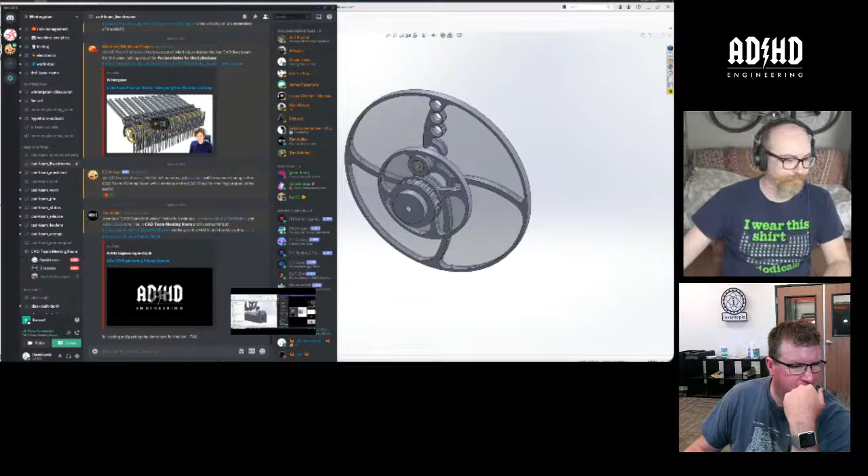It should be streaming now. Okay. There's no audio coming through on my end, so if you still hear the echo, it's not me. How about now? How about now? What? I don't know. Okay. I don't know why. Oh, it's because I don't have you. I had unmuted you on OBS. Say something again. There we go. This is David. There we go. We're all good. We are all good. So let's see. Am I connected to the stream? It says no. OBS is being weird for me today. I don't know why.

I'm going to streaming. I don't know why I did that. Streaming now, or at least I think. Yeah, it is. I can see myself. I just moved. Okay. Whoops. I don't know what I hit. Is the stream still going? Yeah. All right. Well, there we go then. Yeah, I don't know why. Crazy delay, but it's always been like that. Yeah. Well, no.

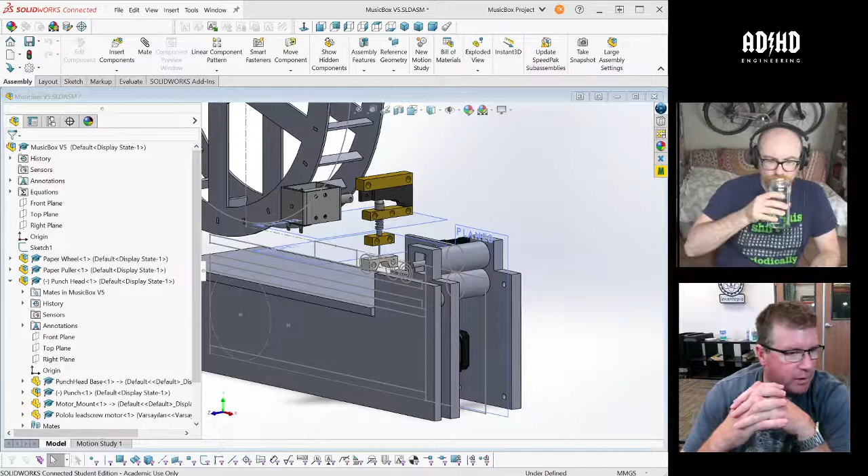So that is that. There's been a lot of work that I've done on the music box, kind of as a trial project, and David has been working on the MMX studio version. We both have stuff to share. We have opinions to bounce off each other about how we're going to do stuff, and David has some specific things to chat about in terms of how we're going to use SolidWorks for this project as well. So let's dive in.

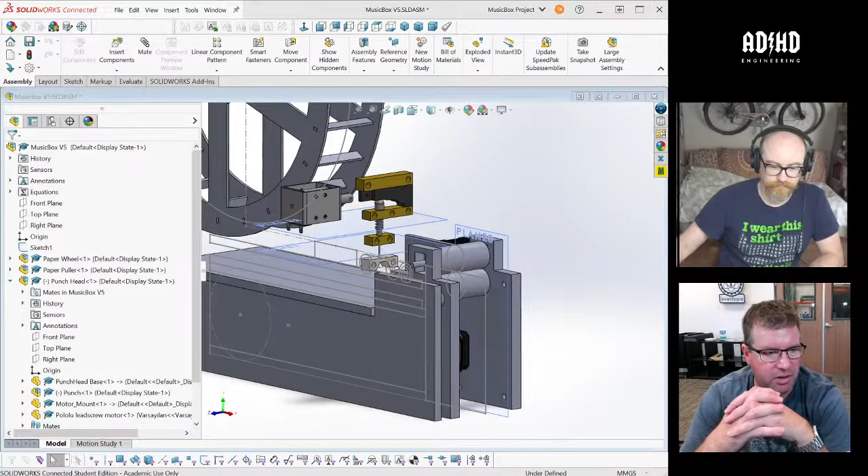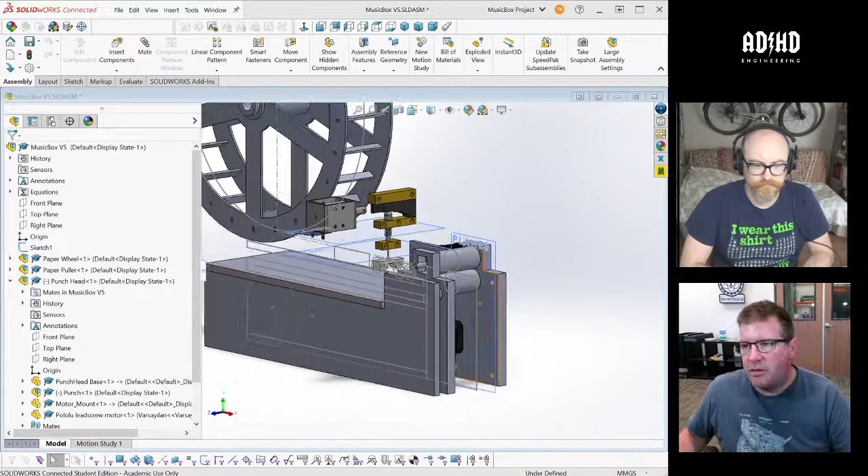What do you want to do first, David? We can go over the music box if you want. It's up to you. Okay. I don't have any preferences. All right. Yeah. Let's do that because I think normally that's kind of our flow, right? So just in terms of figuring out how we model things and what our process is going to be like, I started over the music box. You can see this is music box version 5. And it's because we're experimenting with the process, right? But I am now starting to treat this like we would want to do it.

So in SolidWorks, we have an assembly. There are no parts directly in the assembly. We only have sub-assemblies. We were talking about how we're going to do this with the marble machine. And the marble machine, we're probably going to have assemblies and sub-assemblies, so there'll be no parts in the top 2 levels. You'll see I here have... Yeah, I'd say that's pretty accurate. Sorry, I didn't mean to interrupt. Yeah, okay, that's fine. And so here I have the paper wheel, and it's got the parts in it.

Only the punch head has a sub-assembly, and that's because the part that goes across will move with respect to the larger module. So this one's a little simpler, but what I want to point out, and this is kind of how I was playing with working this way, is that if I turn all these guys off, I have some basic assembly reference material here. This is just the bare bones of the shape of the thing.

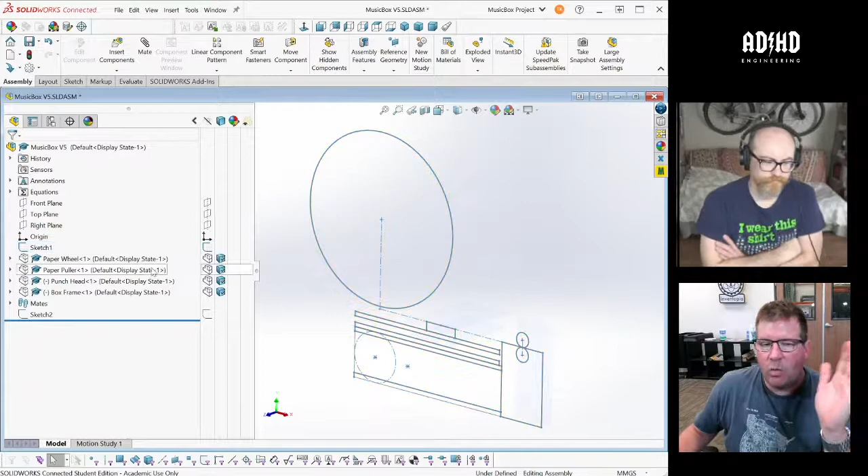And I don't know why it happened, but when I added another sketch to the top level assembly for reference geometry of how things are going to line up the other way, it put this down here. It didn't put it up here, I don't know why. It doesn't really matter, I guess.

Have you tried dragging it back up? I have now. Oh, it worked. Why did that work? Okay. That's kind of a derp. Like, have you tried moving it? All right, yeah, good for SolidWorks.

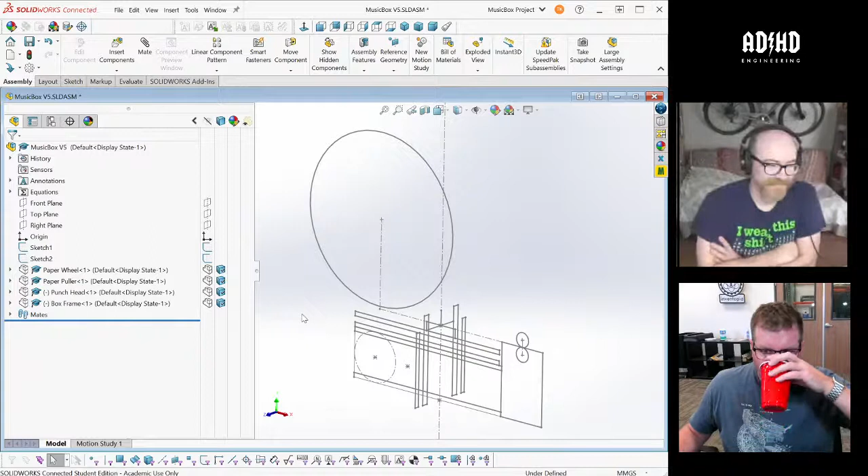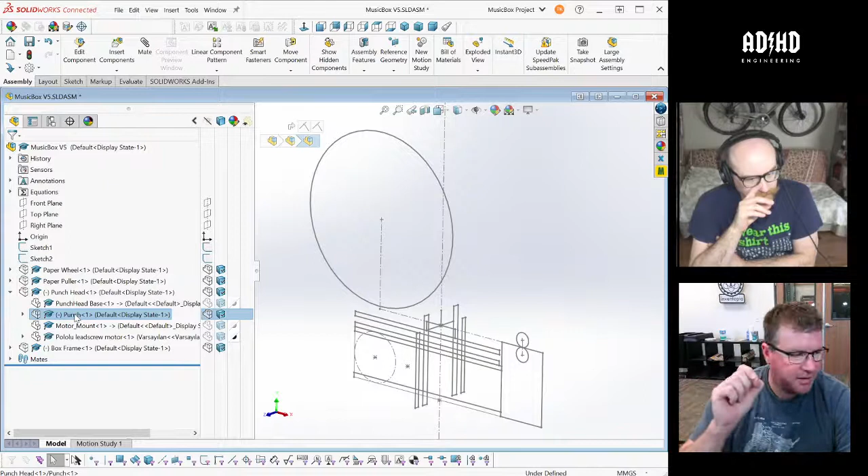Parenthetically, I also did a thing where, when I had this punch head thing, I realized I had an assembly, and then I also had this punch sub-assembly for the carriage, and I brought it into the master assembly. I was like, no, that's a sub-assembly of the thing, so I just dragged it into the other assembly, and hey, that works in SolidWorks. That's so nice.

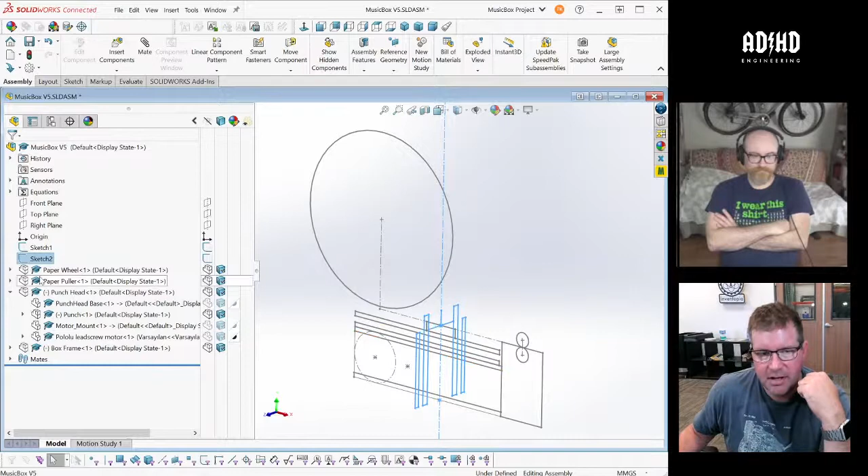In any case, we have this master reference assembly. You can see, since we have the relations, these guys only relate to each other, right? And there's not a whole lot of detail in this skeleton. If I turn on this guy, this paper wheel, it has its own. I'm going to drag this one up too. Can I get away with it? It worked with the other one. You should be able to.

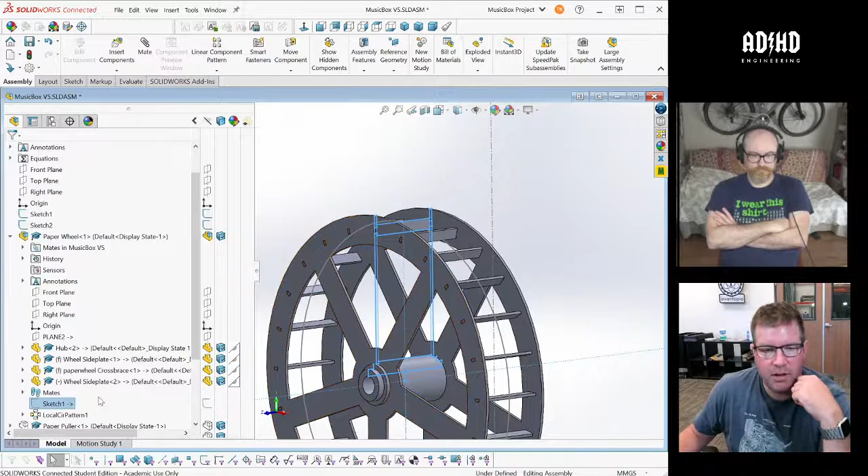Either way, you can see this one has its own sketch geometry, which defines the size and the shape of this hub and a bunch of other things. And if you look at the references, it is only related to this first sketch. When I made these wheel side plates, first I made the hub, and it would be really easy to draw this side plate starting with a sketch that's on the side of the hub, right?

And David, you can tell me if this is the wrong thing to care about. But my feeling was, if I deleted the hub, I didn't want to break it. So when I did this side plate, I made inside it its own reference geometry for where it's going to start, based not on the side of the hub, but on the reference geometry that was in here. Does that make sense? So I don't have any dependencies. The dependencies here are on this sketch, not on the hub. So you shouldn't have parts within that subassembly that are referring to each other.

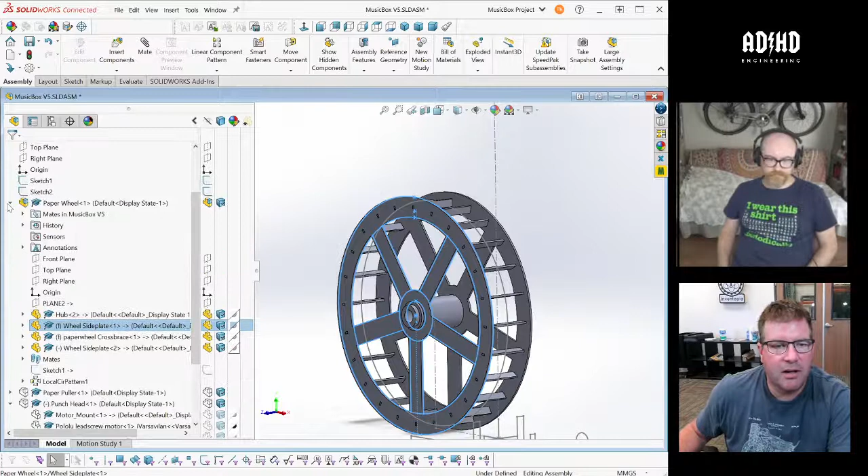Let me show you the counterpoint to that, because I did this incorrectly in another part I was working on today. Let me turn off this guy. So here's the paper puller. And I love, by the way, the show relations arrows. It's amazing. Actually, I don't want the paper puller, sorry. That's the wrong one. Punch head. And turn this guy on.

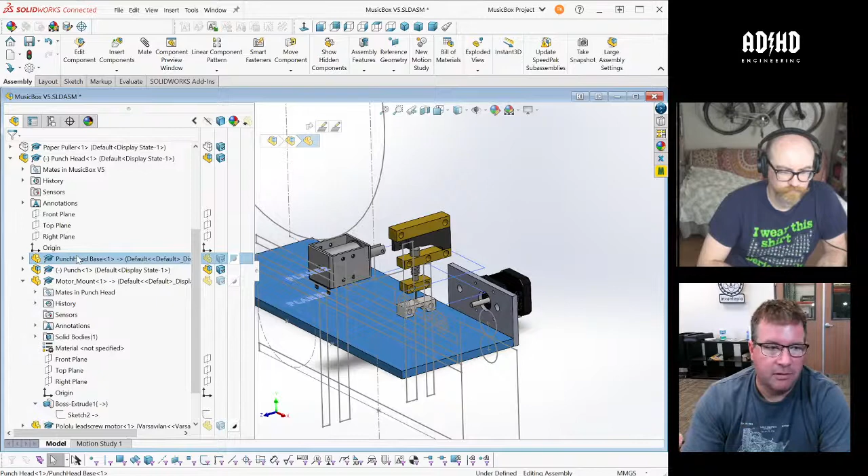So here, this plate, when I drew it, I wanted to get it in place before the stream, and I realized I didn't have reference geometry for it. If you look at this boss extrude and its sketch, this is referring to this base. So if I delete the base plate that goes onto the music box below it, I'll have broken that. So as we go through things, we want to make sure you have some reference geometry in your assembly, and you're only referring to that. Does that make sense? Is that something we should care about?

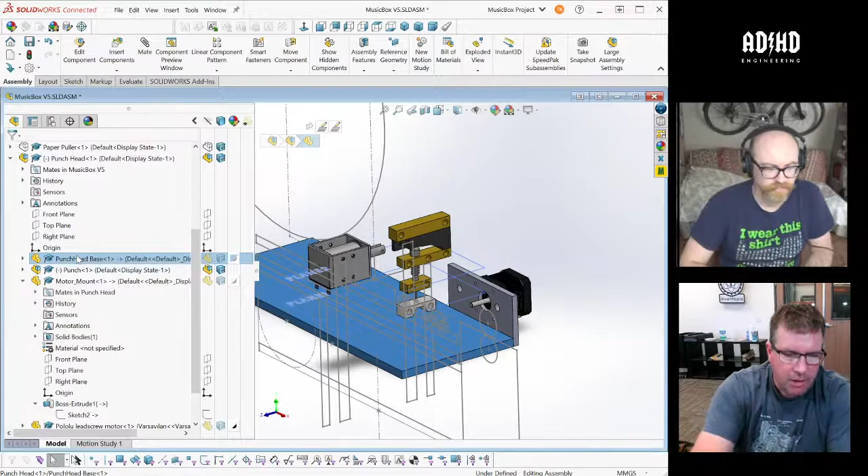Yes. Okay. So that is actually one of the best ways of doing it. For the most part, you always want your parts to look up to some level above it. And if two parts within a subassembly both look to the same geometry, then they're on the same page. So yeah, that works. You caught yourself, that's good. So this reference would be bad.

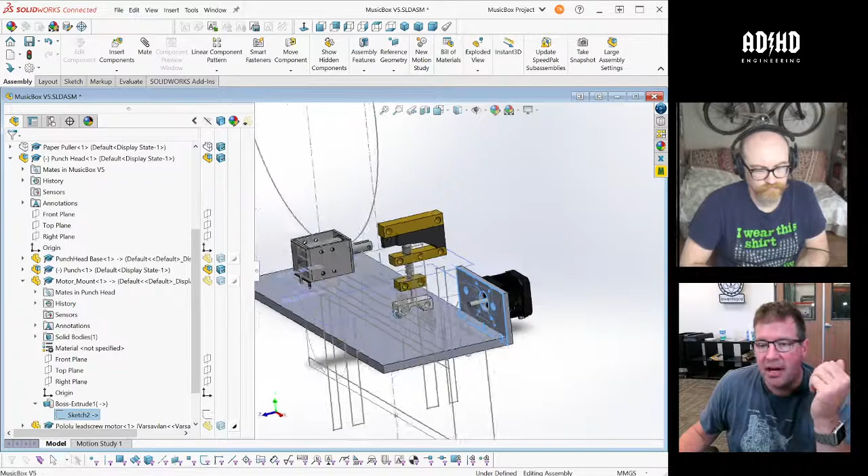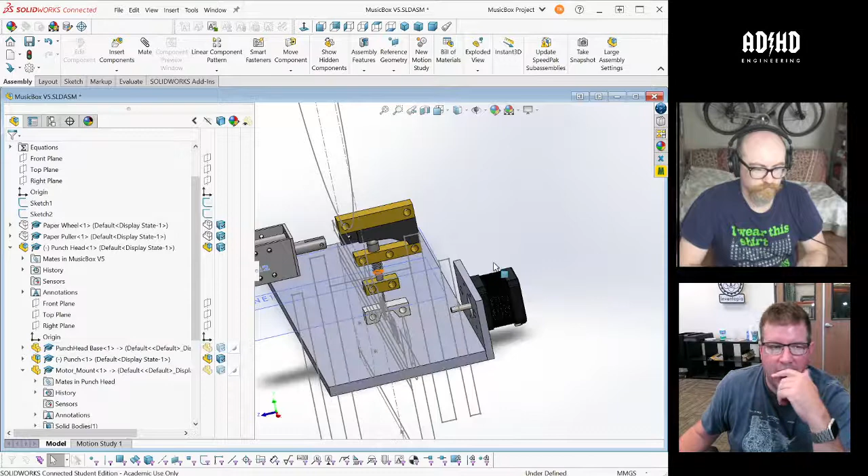It's a natural way to do it because you're picking a plane. But I do have a point in the reference geometry that I can point to, make a plane there, and then avoid having to refer to this, because if I suppress this feature, I probably will break it. Well, I don't know if suppressing breaks it, but if this one went away, I would have broken that part, right? So anyway, that's the idea. So that's feature number one. I'm really happy with this.

And by the way, I can't show it on the stream, but I've shown it to a few people privately because I'm working on a medical robot, essentially, for pathology. This is a startup I'm joining. I'm doing it in Fusion the same way I did it here, where I have a bunch of different skeleton sketches which lay things out, and then I've made sub-assemblies, and I'm trying to basically do this workflow in Fusion 360, and it is a pain. It's a mess.

Anyway, I'm loving how this workflow works in SolidWorks. It's not really something where you could say, oh, if you just did it that way in Fusion; it would need its own workflow for doing it that way. But I am loving that I can just pop into any of these sub-assemblies and edit them in place. I can drag components from one sub-assembly to another sub-assembly. I'm loving that, especially having dealt with it.

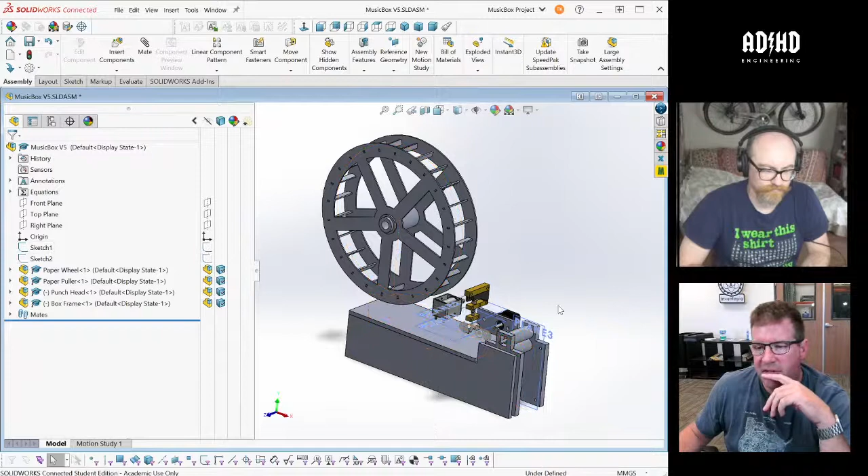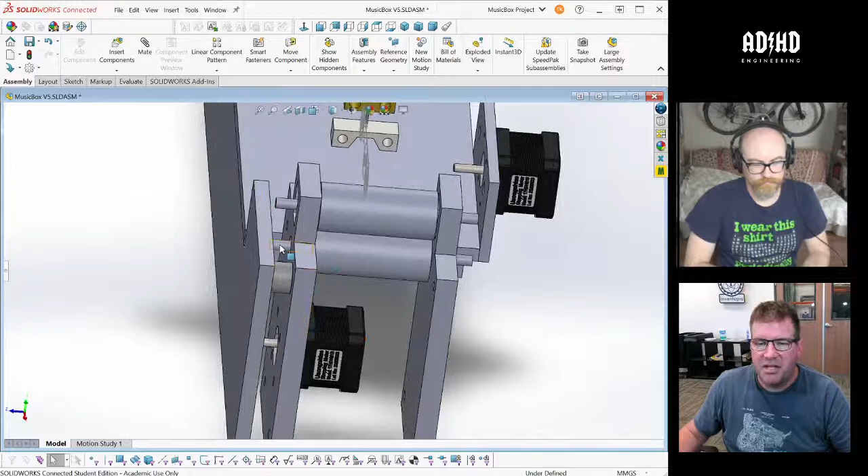Anyway, specifically on to what we're doing with the music box. Let me turn off these reference sketches and hide these temporary planes. Again, the idea here is that we have a music box with one paper pulling mechanism. This stepper motor down here will be driven with a belt up to here. This is vibration isolated. I've only put in the minimum geometry to make sure that it clears; I haven't done full featuring of this. So this one will drive this roller, and this roller will drive that roller via friction.

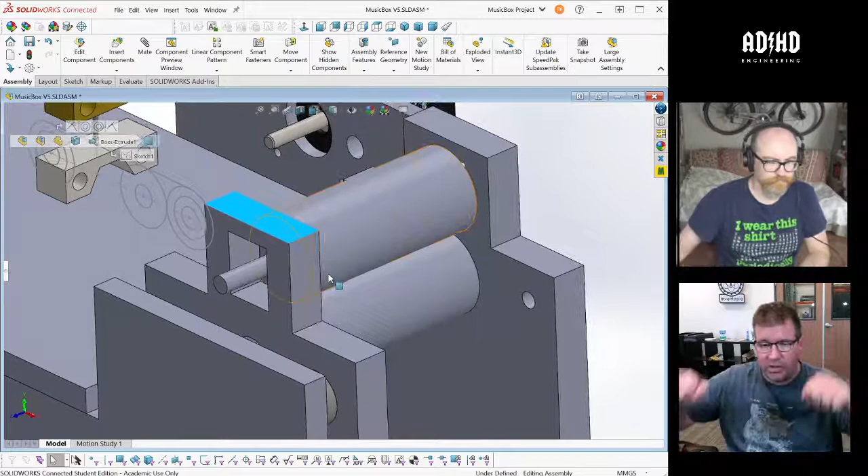These shafts will be mounted with a bearing on a sliding block. There will be a hole on the top of this plane here to push down so we can tension the two rollers against each other, and the paper will wind through. But the concept of the machine here is that this base plate can pop in and out, and actually it may be a subset of that plate. You'll see that there is below that plate. This isn't the top of the box. The top of the box is here.

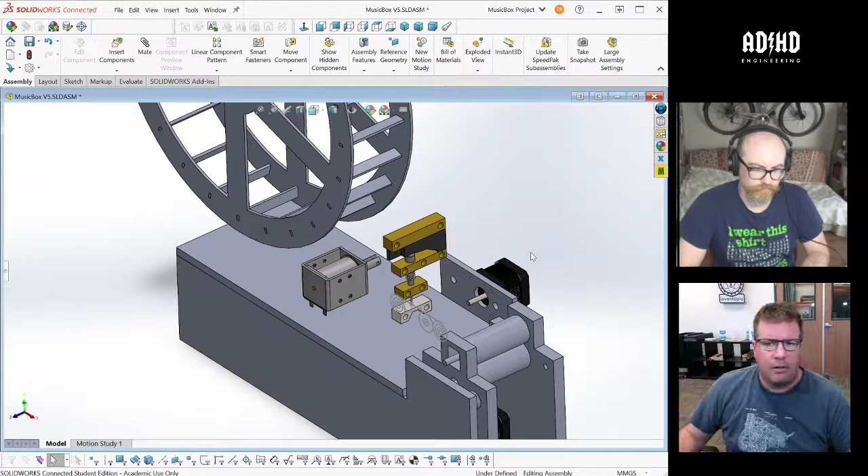So you can either put in this head, which will do the punching, and we'll figure out how to do all the electrical connections, or you put in the playhead, which will play the music back. There are a surprising number of people who are interested. There's been a lot of people who've made automated paper stuff. There's websites like musicboxfanatics.org. So there actually might be a market for this as a place where you can download a MIDI track. I've found websites that have MIDI tracks that get converted to DXFs so that you can punch music, and things that are arranged for this. They have songs for it.

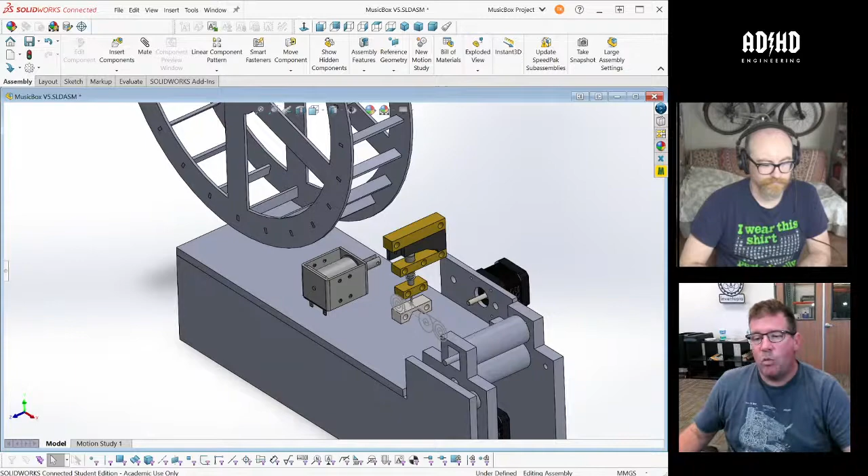But the idea is that whatever controller is living inside this box will have a human interface right here. Actually, it would be on this side of the box, but I haven't mirrored that yet. If you plug this thing in, you'll be able to insert an SD card, and then this thing will shuttle back and forth and punch your music for you. Between these two rollers, it'll advance it for you. You can get the music box paper in a big spool, so I'm going to make sure that the spool holder is compatible with the size of the spools that they sell. And then you'll have a way of both punching music and playing it back.

That's the idea. We'll reuse a machine interface between those two different things. We'll reuse the Arduino that's in there running it, and essentially reuse the paper pulling mechanism for both of these machines. So that's kind of the idea.

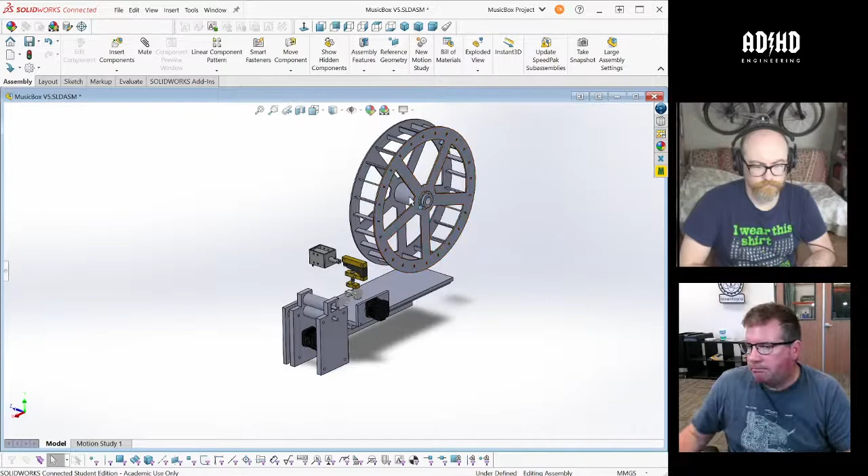I was talking with Joran. I don't know, shout out Joran if you're with us on YouTube.

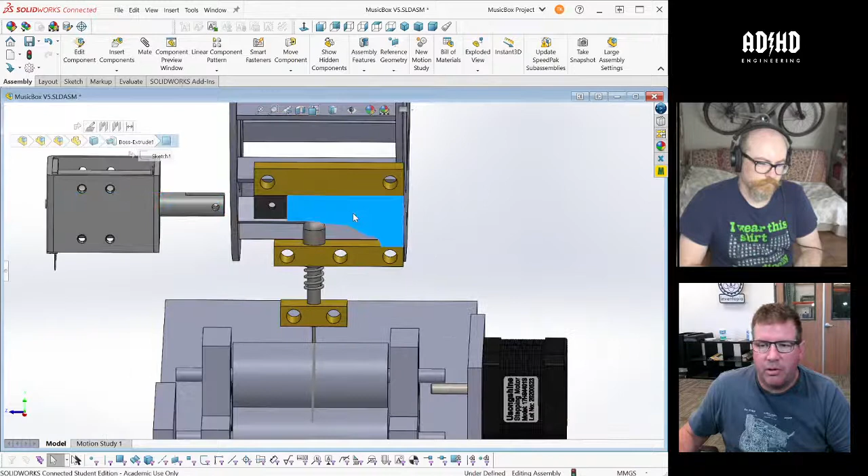Yesterday, about this punch head. The idea here is that we have a spring-loaded thing, and we have a solenoid which will pull this guy, and this is a cam. So basically, this first little bump down will bring the punch into contact with the paper, and then I have a very slight angle. At first, this is where the punch is going down and going through the paper, and then I have it basically punching all the way through, because you want to be able to push the paper.

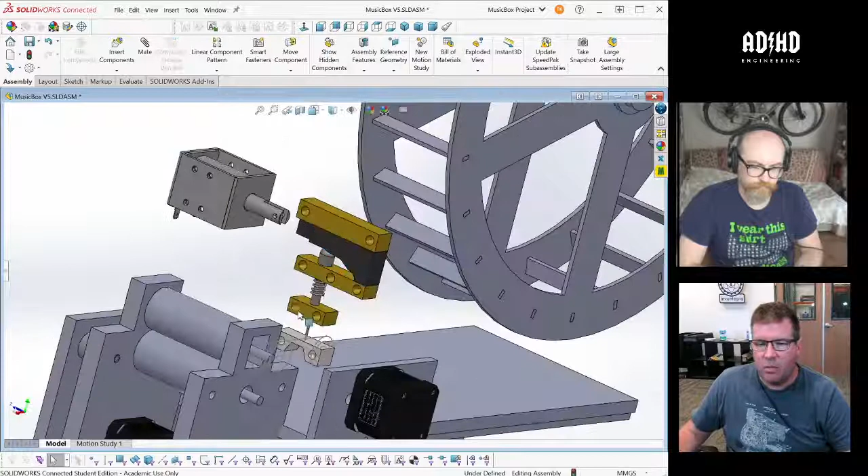I haven't made the hole in this die yet. We need to be able to push the paper all the way through this die to clear it. Otherwise, you're going to be pushing a bunch of paper and packing it into a hole, and it's going to foul. So you need to get the punch all the way through.

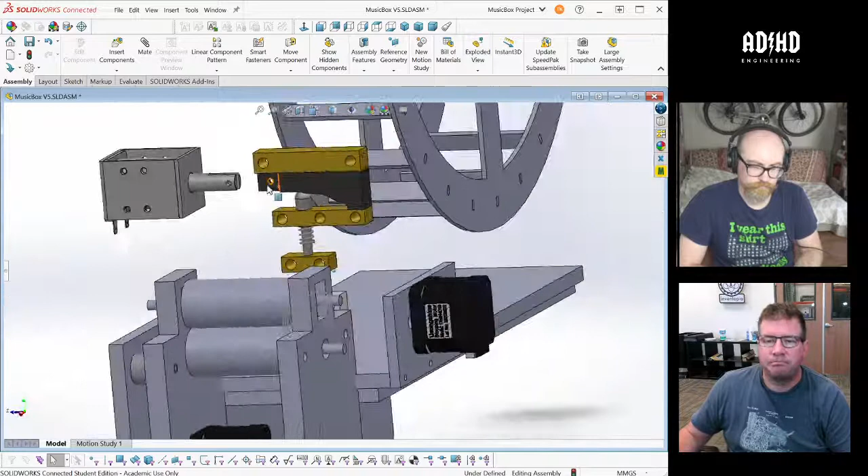So that means we have a total stroke length for this thing of 7 millimeters, and the idea here is to use this solenoid to turn 1 inch of throw into 7 millimeters of travel, and to have it not be exactly linear, but to kind of use the travel of that thing to exert the most force when you need it, and then to speed it up. So that's why I have this, it's kind of like a cam, but sideways.

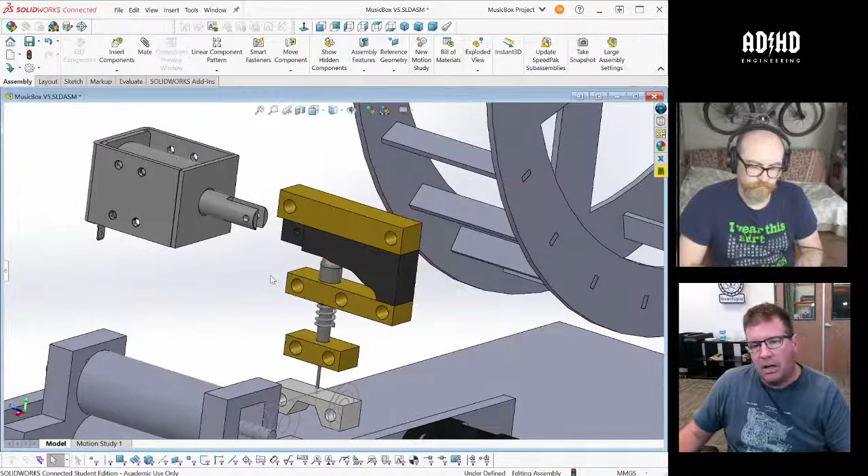But all that stuff said, I have no idea if the solenoid is going to be strong enough to do this. There's obviously a lot of friction built into this solution. I don't know how I'm going to mount it yet. I had a mounting plate behind it before, and I didn't like it, so that's why it's not there right now. So it might be that we go with a gear motor and an actual rotary cam. Anyway, so that's kind of where we're at, and still brainstorming on that front.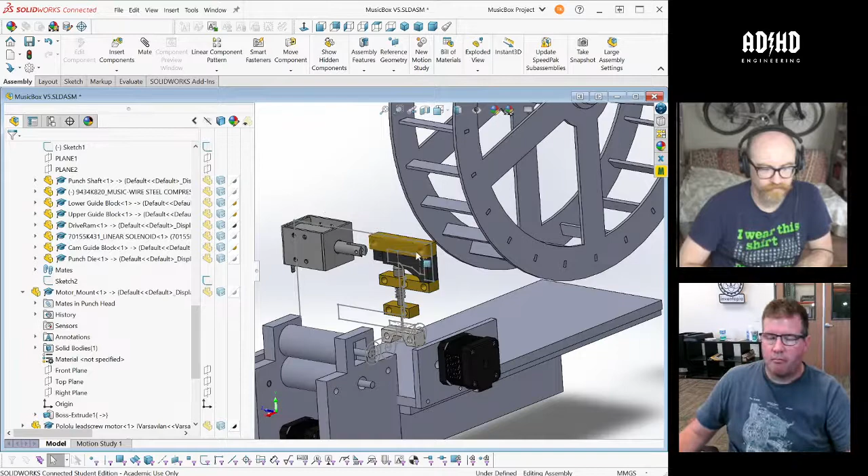You have any constructive criticism for me there, David? No, it's looking good. I think once you get this a little bit more refined, you might find that attempting to model contours in your layout sketches is probably, I don't know, I think it's probably a bad idea. But obviously, you probably won't get into too much difficulty with that here because it's not a giant machine with a lot of parts, right. So you should be fine.

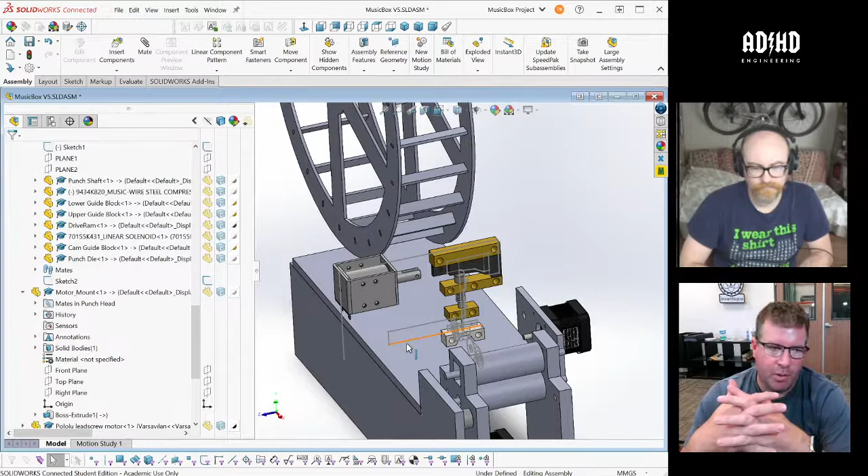Yeah, and there is something a little bit different between this project and the MMX, which is that with MMX we're mostly going to be, I would say, curating designs which have been designed and prototyped outside, and they're kind of already almost done, at least on the concept level, right? They're going to be pretty much done conceptually by the time we're doing it here. Here, I am laying things out, and I'm doing a lot more iterative, what is actually going to work and what isn't.

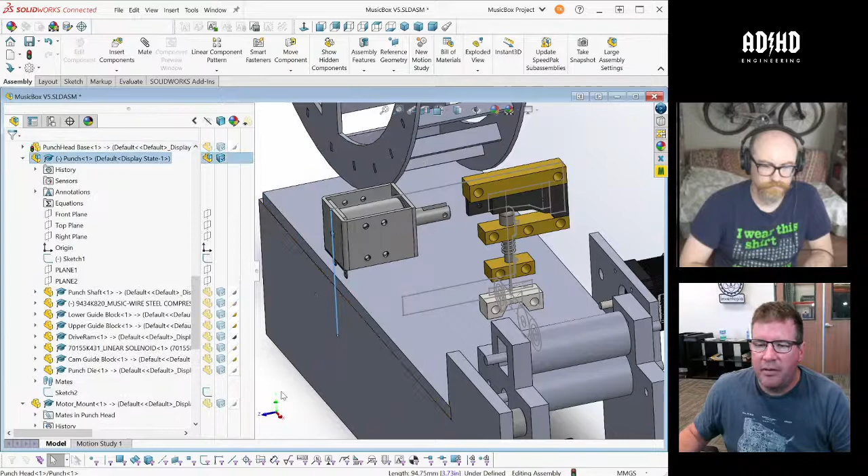So you can see, in this sketch, these lines are part of the outline of the kind of plate. I was going to sandwich these functioning blocks in between two plates of aluminum, so it would just kind of auto align itself up. I don't know if that's going to work. I tried it that way. It looked big and bulky, and I didn't like it. So I still have to work with that. That's why you have CAD. Yeah, exactly.

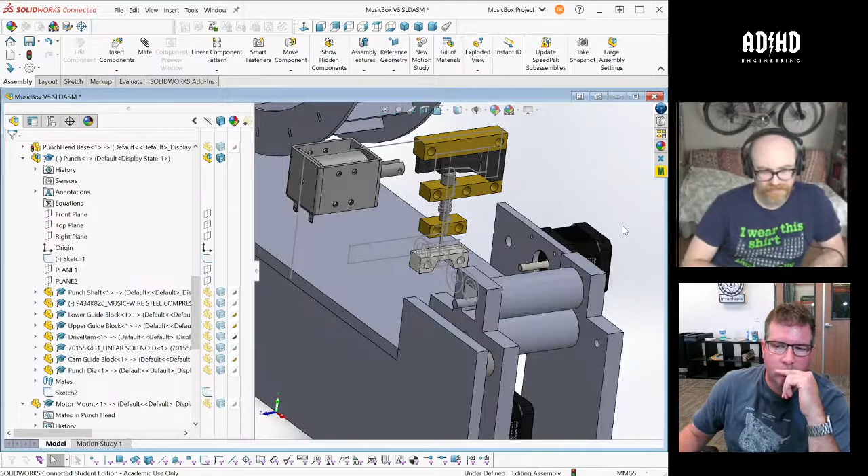So anyway, the only other concern I have with what I've seen so far is, generally, only do a revolve if I know I'm revolving bar stock. I saw that your wheel is a revolve, but you're really making that probably out of some kind of sheet. The hub is a revolve. Good. I believe the hub is a revolve. Okay. I thought I saw a big revolve profile in your layout sketch for the wheel. No. Oh, I'm certain I saw something like that.

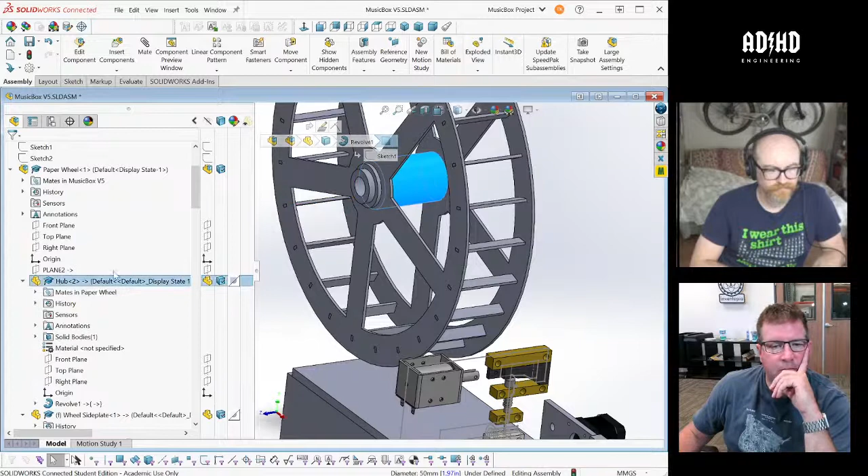Well, I think you were seeing the hub. It's right there, right above the side plate. Well, what geometry defines the wheel? Let's look at it. So here, we have a sketch there. So I do have a patterned revolve pattern for these spokes.

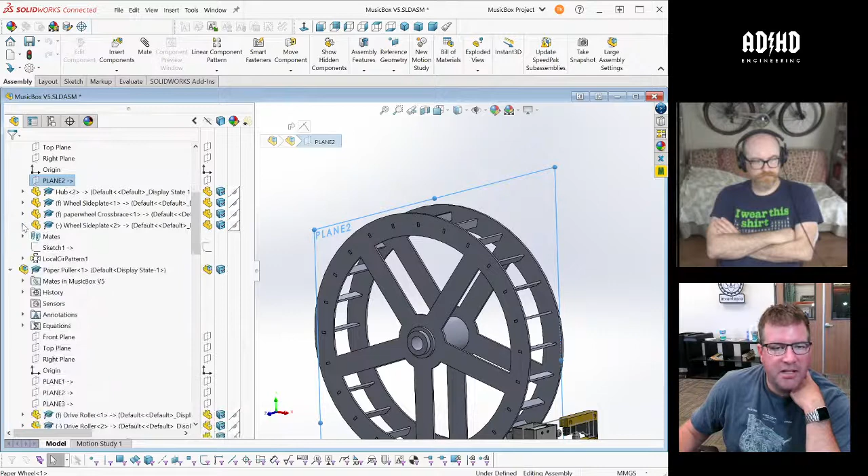I do have that. No, I saw it from the YZ profile. You had revolve profiles. Yeah, so that's just how I did the reference geometry for the wheel. The reference geometry that I thought was really important for the wheel was all on this plane. So I didn't do a revolve, but I did set it up like you would do a revolve. That's what you're talking about, right? Yeah, that's what I saw. Yeah, so I didn't actually draw them. Yeah, I would caution against that.

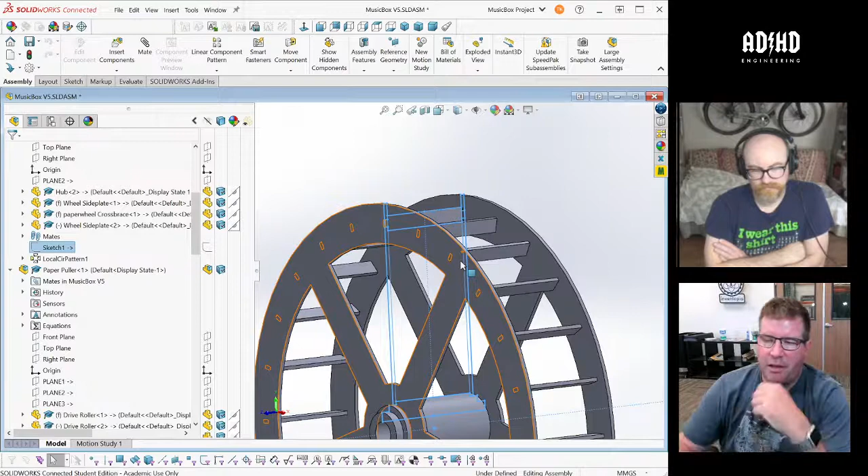Well, I didn't actually make the parts from that, but in thinking of it, this was the plane. If you try to pattern the spokes or anything else like that, it doesn't really matter. The things that are driving this are, A, the thought that the paper is going to live in this trough in between the two things rather than on the wheel like the previous versions had, and then where the side plates were going to be. So here I was able to lay out the key features of these spokes, the thickness of the side plates, and the hub, and have them all work together in one sketch. I thought that was just the most elegant way of doing it.

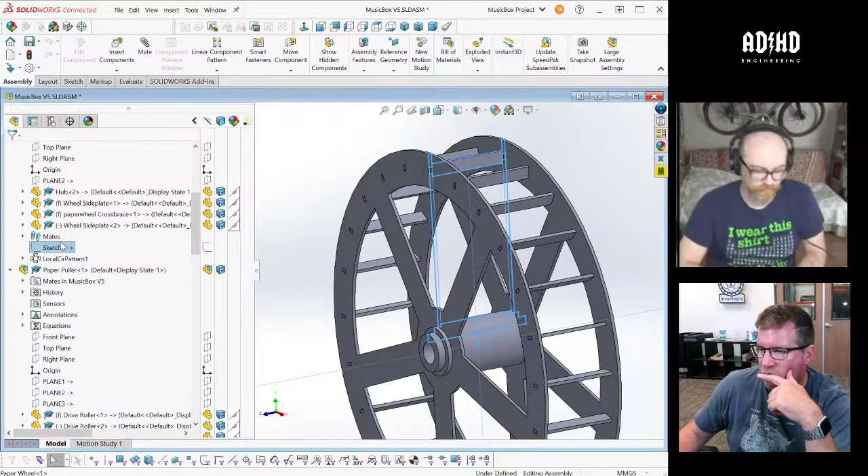But you're correct. It looks like that is a revolve profile for sure. If you were going to make all these things with a revolve, you would lay it out that way. But this is just the reference geometry for this subassembly. Right. Is it just for your own visual, or do you link other geometry to this sketch? I do. If you look at the side plate and that geometry, it references down to here. Even the plane that I'm doing references down to there.

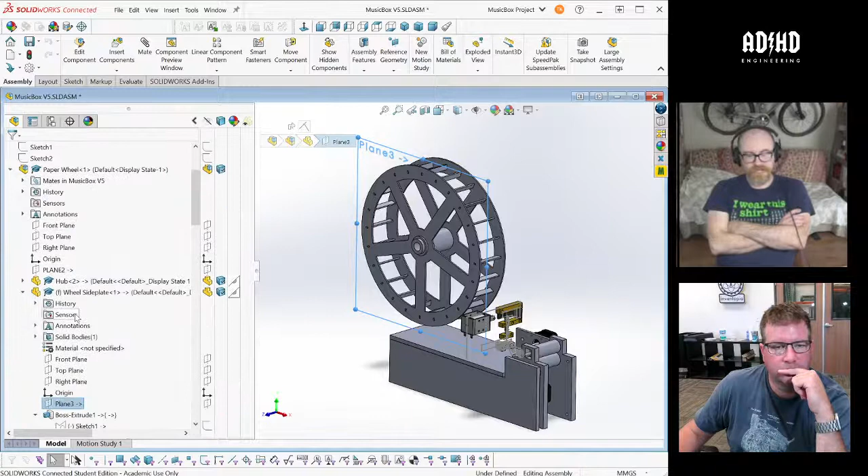Yeah, I would caution against that. A lot of dependencies, really. So I know what you're trying to accomplish. You want it all saved in one spot, but that's what global variables are for. If you need it for your own visual reference, it's probably not a bad idea to keep around. But in terms of having a sketch like that, you almost had it, man.

I know. I don't know why it doesn't want me to drag this stuff up. Oh, you see the arrow? Yeah. There you go. So it doesn't matter where your mouse is.

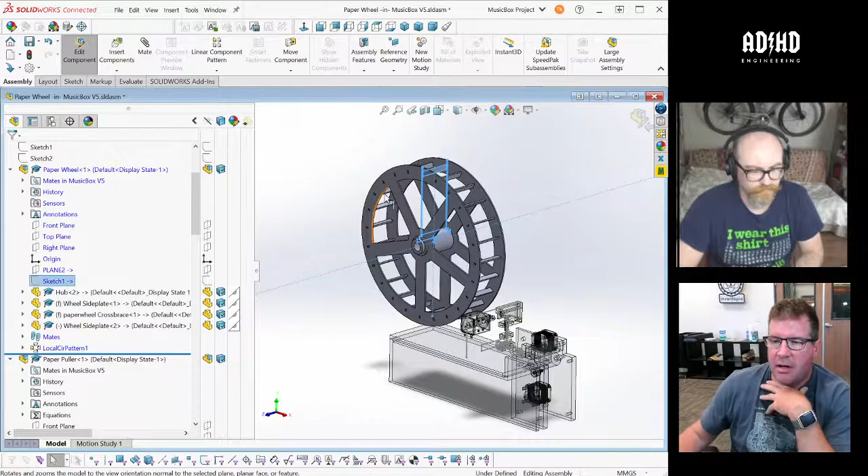How would you have done the sketch geometry that's specific to this part? This is the complete assembly, right? So I only have the two side plates, the hub, and then the things. They're going to be on top of the support for the paper wheel, which is going to be its own subassembly. So how would you have laid this out where you could capture all of this geometry? Right. Well, your hub is going to have the distance between the bearing races, etc. So that information you either keep in the hub, and that's where it lives, or you put it in a global variable above it.

Oh, so you're saying not even have it in a sketch, but just develop your variables, like your offsets from the front plane. Right. I see. So basically, I would caution again, if you find yourself making a sketch that has multiple sketch profiles, that's a red flag that you're probably going down the wrong path. Or if you're making a sketch that you don't ever intend on doing anything with, that has sketch profiles in it, that's another red flag. I see it a lot.

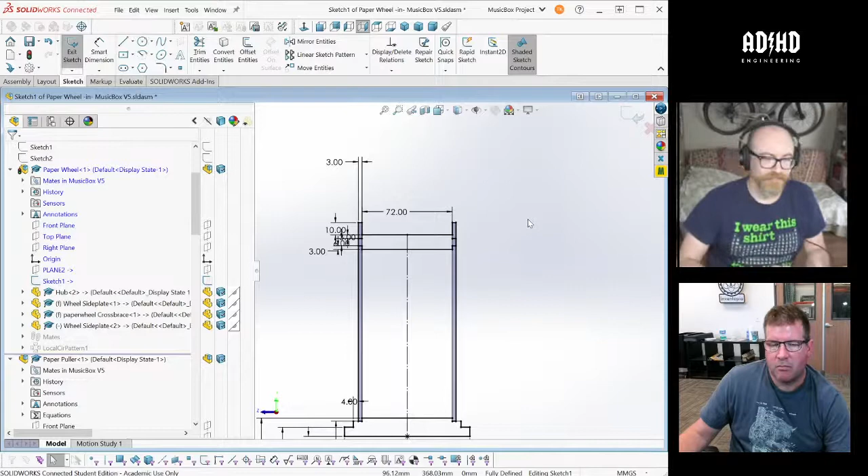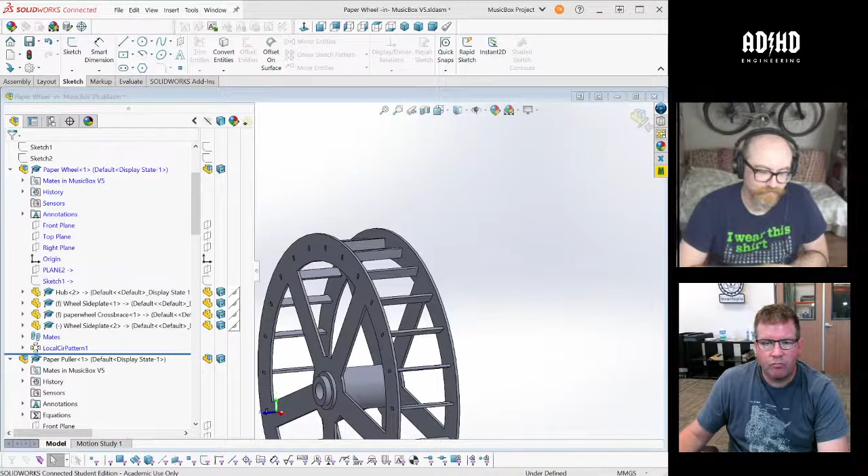Literally it's the opposite of what you want to do. Yeah, well, no, I don't think it's about processor load. I think people are doing that because when you look at a part or an assembly that has a huge timeline, it's really hard for anyone else to go into that part and understand what's happened, right?

And that's just an artifact of how Fusion works with their timeline. It's just like, what the hell is this? When the timeline's that long, you've kind of let things get away from you, I think. It's just more to manage. I totally think the exact opposite.

I think that when you have one sketch and a whole bunch of things that use that sketch, you're talking about, imagine that you have to change something, right? Mm-hmm. And because you have 10,000 sketch contours in your sketch, and you need to change something, and all of a sudden one of those sketch contours disappears because a line moved or whatever. Yep. Now it's like a complete mystery how to fix that. It's just a bad idea.

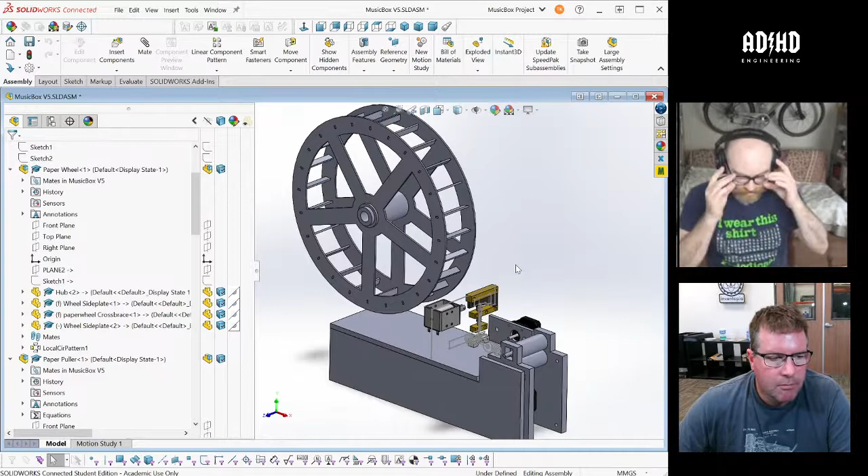It is. I hate to harp on the guys that are doing it, but well, no, I hear you. What I just discovered is it's deliberate. Yeah. Well, I think the differential here is that if you're in Fusion and you're doing that, but let's say everything you're doing, all those features are for one part, right? Then I think you're fine, because you're basically making your design for that part a little bit more granular. But if that same design and all those features... I disagree with that too. Well, okay. I'm thinking that's what you were saying, so maybe I'm misunderstanding you.

But if you have multiple bodies and multiple subcomponents, and your timeline is going in between them, which also means that your references and your dependencies are probably going in between multiple parts that are siblings, essentially, like what we were just talking about, it shouldn't be doing in SolidWorks, then I think that's super bad practice. No, I think it's bad practice 100% of the time.

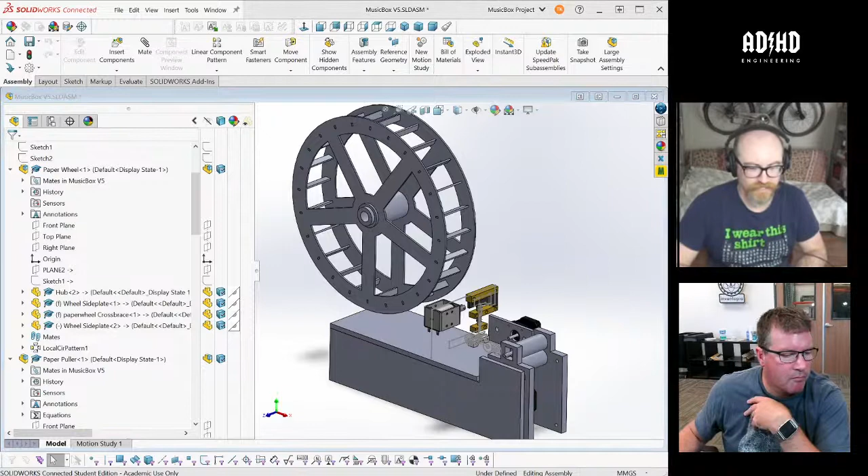If you have multiple closed sketch profiles with the intention of doing several extrudes from it, then you're doing it wrong. Like if you have a layout sketch that has specifications for those things, that's one thing. Yeah, I'm with you on that. But you went ahead and sketched your extrusions and your revolves in your layout sketch. First of all, that's a bad idea. But then this guy also has that revolve profile right there that you're using as a reference, there's got to be a dozen sketch profiles in that.

Again, that's a red flag to me, because really all you need to know is that offset. You need to know the width of the trough. You need to know the diameter of the plate that thing will be made of, and that's all global variables. Yeah. If you need to see a visual representation of that, that's one thing. I get it, and you can draw it for your own visual purposes. But to use that as a data container... I see what you're saying. Yep. Asking for trouble. Yeah, that's why they have global variables.

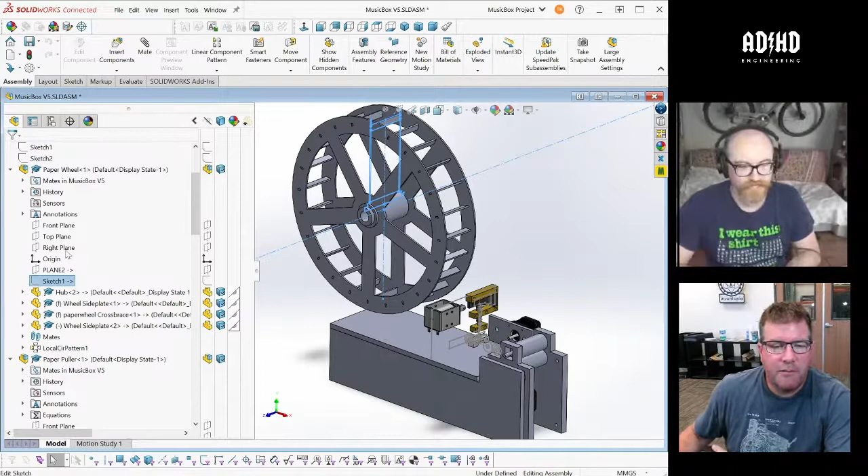So fully guilty, right? If you look at this sketch we're talking about, all the data's here. I did not do global variables on this, right? So what you're saying is that this sketch is more than is necessary? It's just unnecessary. Yeah, right. I would compare it to programming. Like if you're doing everything with one-liners, sure, the whole code is shorter, but it's not readable and it's not understandable because you're doing too much at once. If you do one thing at a time and you define your variables clearly and name everything correctly, then it's clear by itself and you don't need any comments. That's the difference. Yeah. Like you're squishing too much into one slot.

Right. Yeah. So I was using an example in CAD Team chat this morning in this really long conversation I had. I mean, don't get me wrong, you and Newsix are on the same page with this. Like you both use the exact same words and phrasing. Right. I just disagree. I think it's a bad idea. I think it's so easy to destroy your model without realizing it. And the worst part is going into fixing it again afterwards.

It's like you have no idea where to start, because is the leg bone connected to the ankle bone or is it not? Well, I don't know, because there's the ankle, the arm, the toes, it's all in the same sketch, and it's all connected to this thing. And so I used an example in CAD Team chat this morning, just a couple hours ago. If anybody's in there, you might as well look at it.

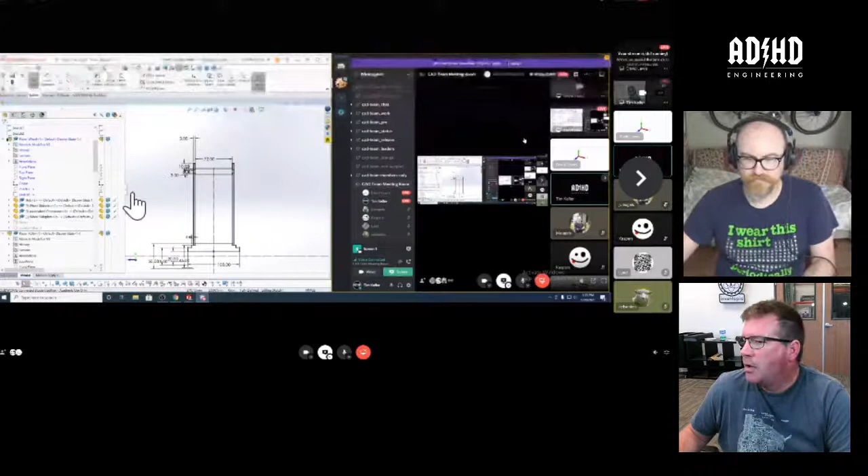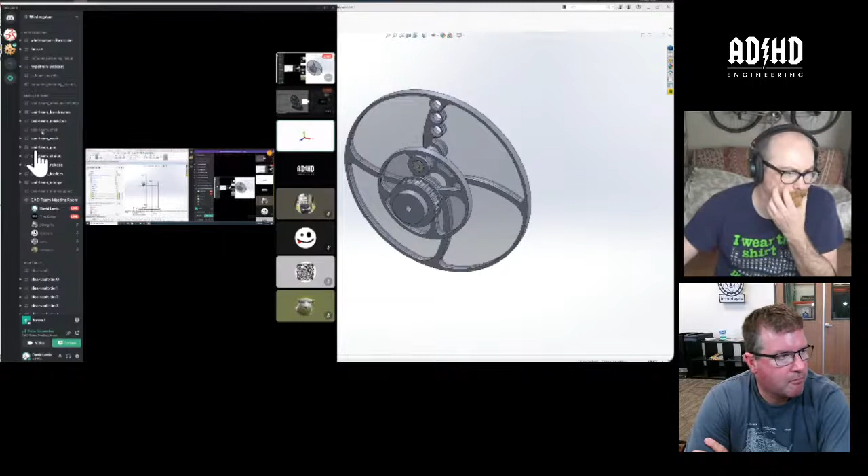Yeah. So do you want me to find it? Yeah, why not? Now we're watching YouTube. Okay, so me watching YouTube on you. You watch. Inception. Okay. So there we go. Where is my? How do I? Oh, right. Where is there? Okay, CAD Team. Well, on the right, that's your SolidWorks version of the same thing, right? Okay. If I click another chat room, do I leave? Oh, there it goes. I don't know why it took so long. Okay. So can you see my screen? Yep.

Okay. So this is the sketch in question. Yeah, it's not the worst one I've ever seen. I've seen worse. This one is actually slightly palatable in a way. But if you look at the number of sketch profiles, there's the outside one, and then you go in, there's the part for the handle connect, and then there's a little teeny weeny one here. And then this part here is used for both. This is the outer one, but it's intersected by this arm, and then inside there's all these hub lines, places where there should be holes, all the fillets are in there too, but they have hole features.

But you know what though? When you showed me this one the other day, I looked at that and I'm like, I want that as a poster in my room. I get what you're saying in terms of it being kind of difficult to manage, but I just thought it was beautiful. Yeah. Well, it's okay. Like industrial art, sure.

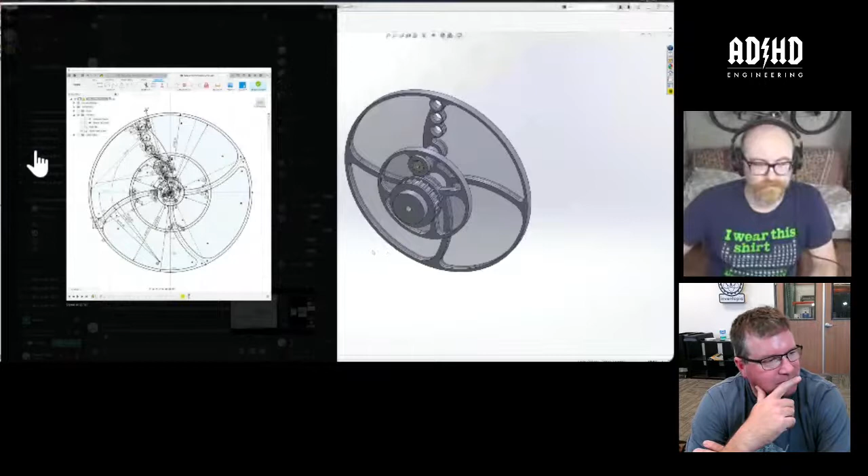Let me show you what I do. Yeah. By the way, whatever we just did, that was not on YouTube. I don't know if the delay is long or whatever, but yeah, the delay. Okay. Can you see my screen now?

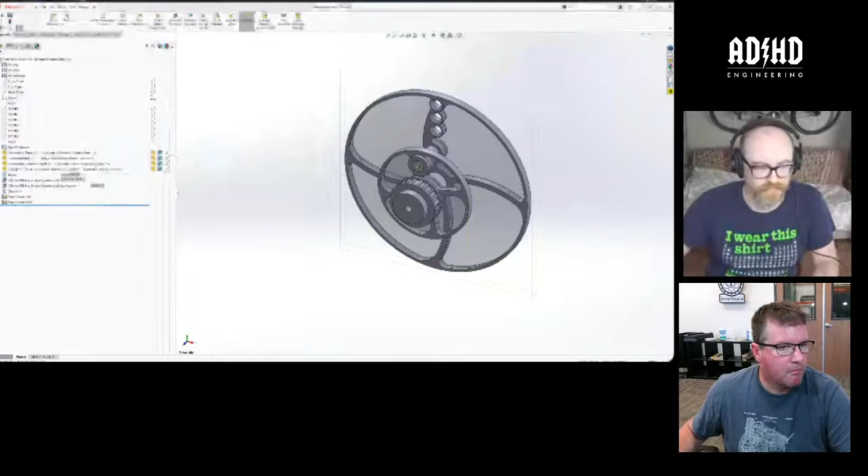I can. Okay. So this is the equivalent part in SolidWorks. It's actually not 100% done yet, but I'm going to go into my crank wheel big, which is the part that we're looking at. So this is the component that goes in that assembly. It is 6 bodies. So it's the 4 panes made of polycarbonate or whatever that stuff is, this cap and then this body. There's a reason that it's set up like this; I can explain it later. But basically, this is the entire timeline. It's not big. Let's go through one by one.

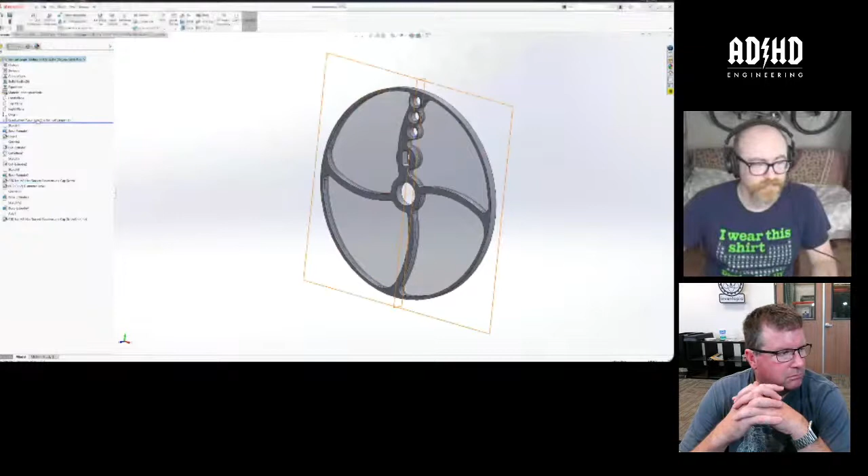So it starts with sketch 1. Sketch 1 is an extrude. It's literally just a circle. It defines the outside. And then I extrude it mid-plane because that's how this particular component is designed. And that's how you want to make gears, by the way. You always want to go mid-plane.

I popped the hole, but the reason I put the hole, come on. I actually have an ice pack under my computer. It really is kind of struggling sometimes.

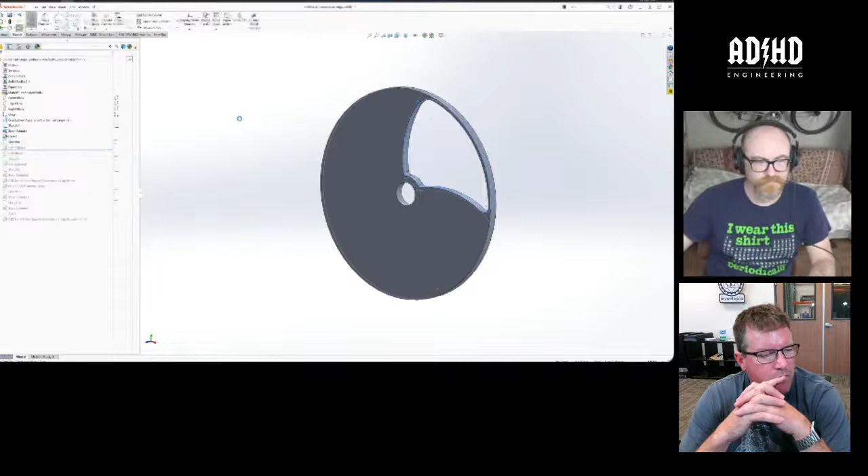Okay, so I put the hole in now. Normally I wouldn't do that, but I put the hole in now because this is actually going to be used as an offset for the hub. So if I go in Sketch 4, this is where the meat is. This is where the money is made. In Sketch 4, I pulled this geometry from the old crank handle, right from Martin's original project, so that I made sure I got it right. There's a couple of things I did change, like this radius is close enough to 125 that I'm just going to leave it there.

It's not critical. It's aesthetic. But I used a 4mm offset from the hub. That gives me a construction line. Or sorry, from the through hole. That gives me a construction line that I can then make another offset from, because in the end I want it to be 8mm. And if I do that offset first, then I can just offset the entire thing around.

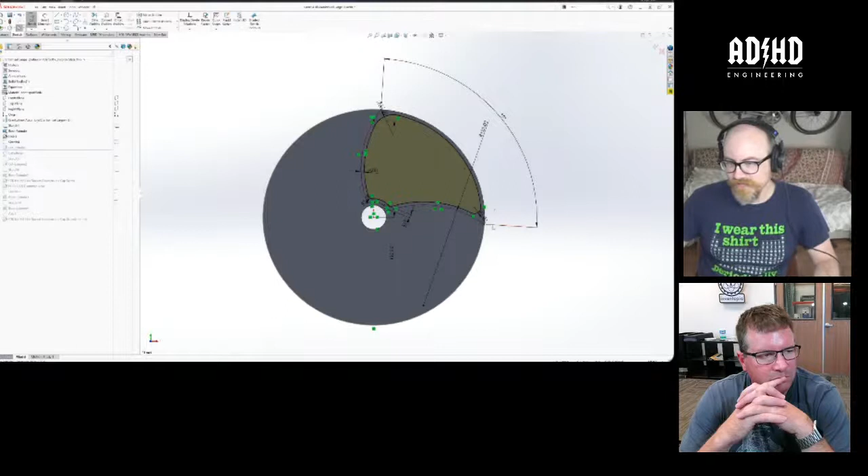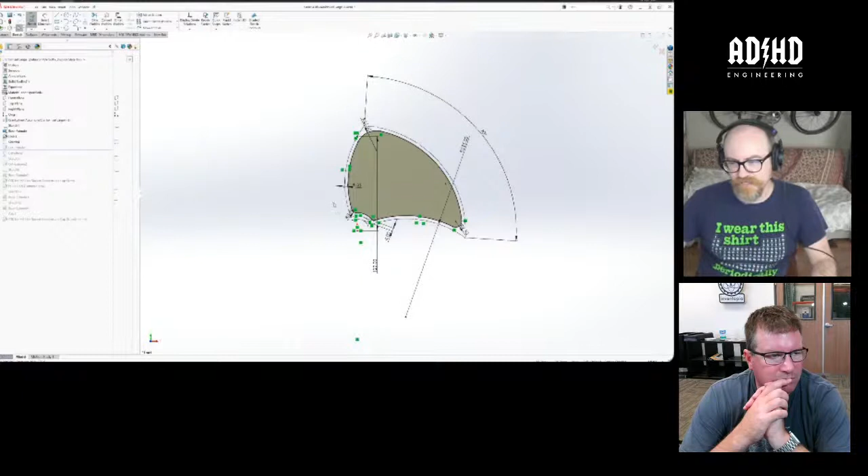Right. So if I get rid of the first sketch and the first body, you'll see that this is literally the entire sketch. It's this construction line and then an offset. Boom. And so I offset everything. And then once I offset it, I put some fillets in there. And the reason I put the fillets in first is because I'm doing it once. If I were doing a sketch with 800 of them, I wouldn't do it like this. But it's going to be patterned around, and it would actually be more work to do it as a feature next than to do it here.

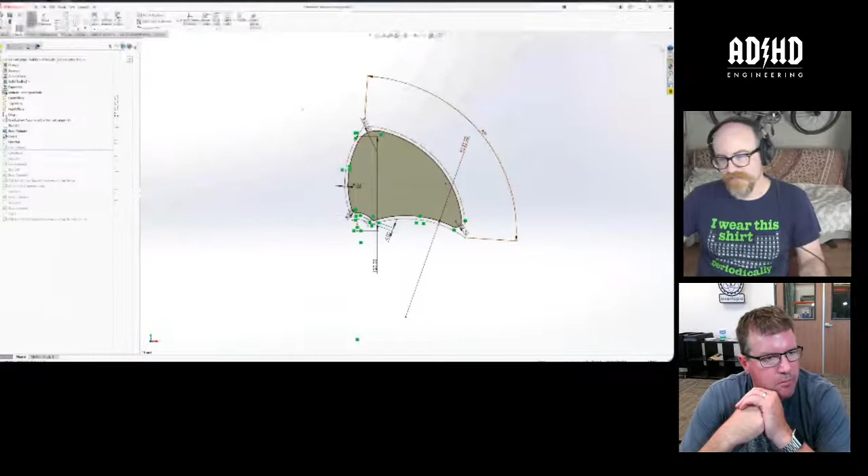So I did it. Do you have multiple radii of those different fillets? They are. Radii. That's another reason. Yeah. Okay. If they were all going to be the same, I could see just doing one command after you revolve it. Yeah, but they're not. So thank you. That's a good catch, because that's really essentially why I did it. And then I did a single cut. I patterned the cut. So now I've got that.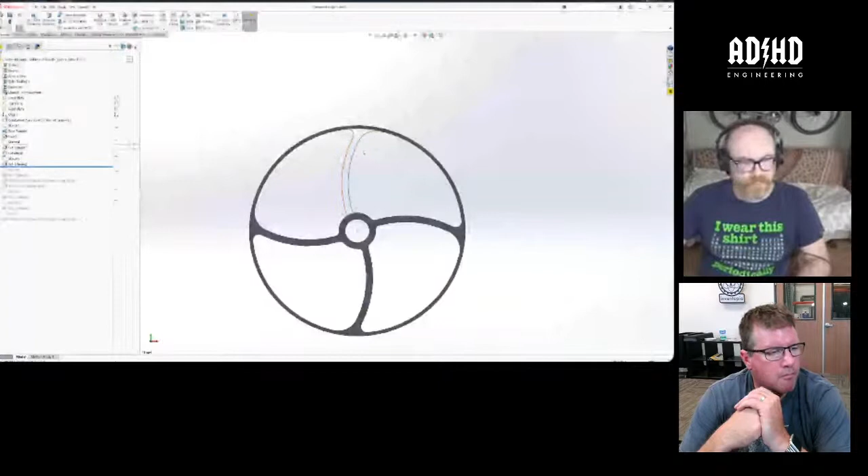Then I just cut the top one off by doing a, what do you call it? Convert entities. So now I've got a sketch for this leg, which I then used some of the geometry to do this profile. And this profile is the positions for the handle, and then this guy that holds that connector. So once I did that, then I just extruded it back in.

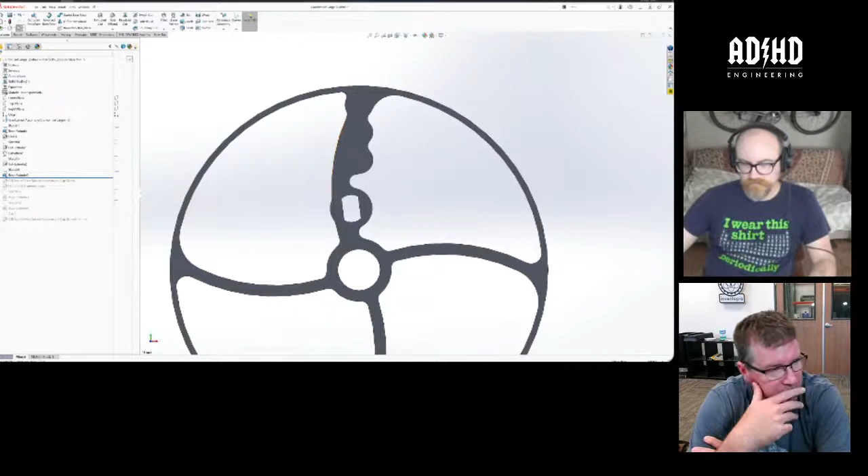I don't know why, but that really deep profile just above the connector and before the three handle positions, it just seems really weird to me that contour goes that far in. It just looks weird. Anyway, go ahead. This oval? No, above that. This? The little inlet above it. Yeah, there, the Gulf of Tonkin right there. I think it's like that in the original one. I know. Just thinking it's a weird design choice.

Yeah. So I'm not in Martin's head or whoever designed this back when they did, but actually it's kind of a fortunate thing, because when the handle is straight up, you'll notice that this thing is just very slightly forward of 12 o'clock. So what that means is that from the default position, if you mash down on the foot pedal, it's going to go forward. Exactly. And I don't know if that was an accident or on purpose. But I can tell you that if you compare that to this sketch, you would never figure that out. It's actually at a weird angle.

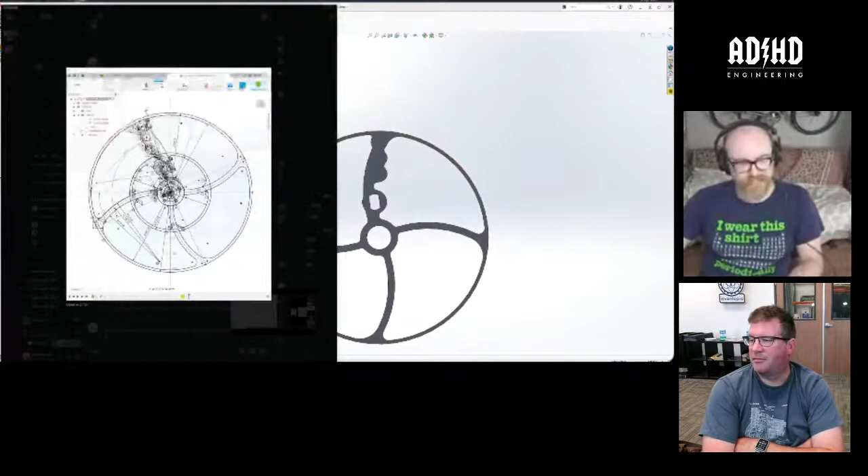It looks like it was just captured in a weird position, and then somebody's like, yeah, let me just sketch it in that position, instead of sketching it in a vertical or horizontal orientation. I mean, it was probably from a video frame. Yeah, exactly. So there's some design intent that got lost in translation that you found just by doing the geometry differently. Yep. Basically. So anyway, then I just followed through.

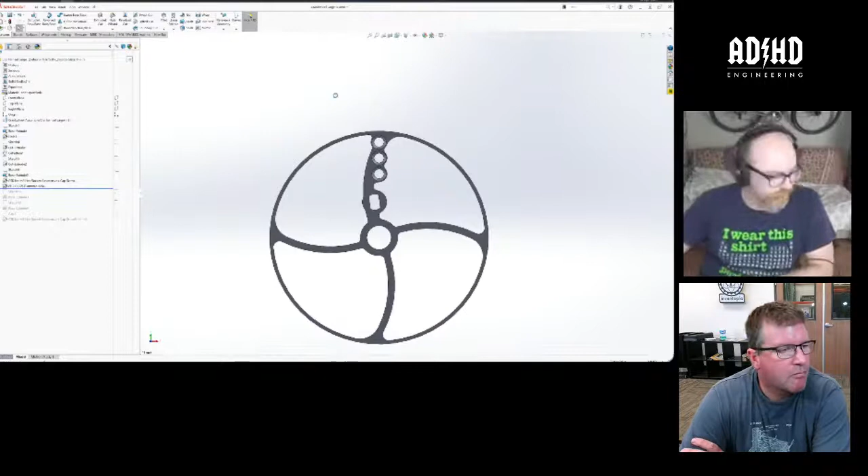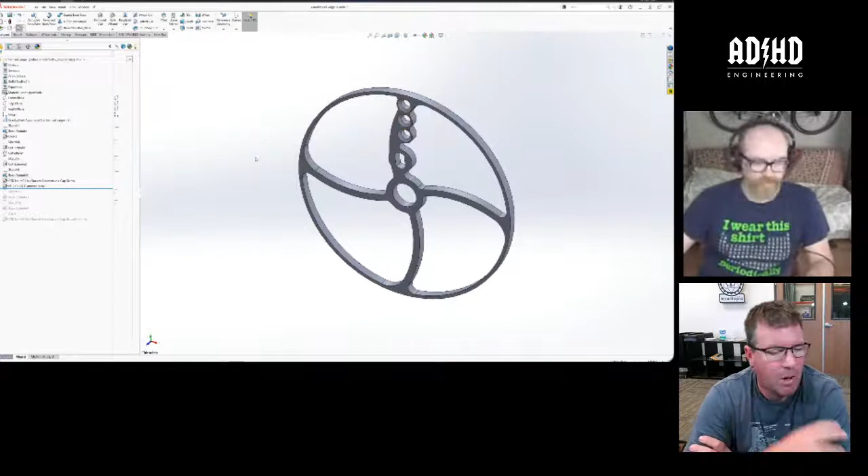Computer's really struggling right now. I'm sorry, there's some delay. I think it's probably because of OBS and all that stuff going on. So when people were complaining about how pixely the stream was, I had the stream set to ultra low latency, and the way YouTube achieves that is the latency goes down, but your frame rate and resolution also go down. So I changed that. For me, it's more about heat though. But I think we're clipping less. Yeah, it's not on your side; it's on mine. My computer's overheating. The problems with SolidWorks have nothing to do with YouTube. Really, the problem I'm having right now is heat. I have a Xeon and a Quadro inside of a thin and light laptop, and it just can't let the heat go fast enough. Right.

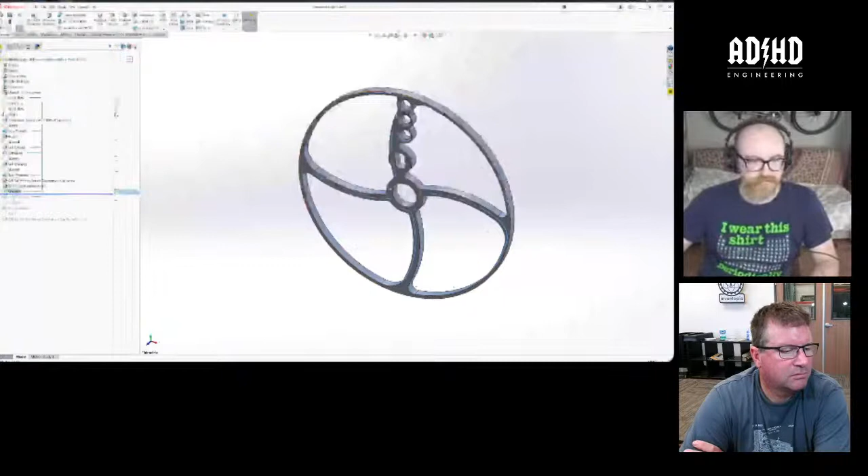And then for one last thing, I added an axis that is coincident with the top plane and the right plane, so that I have a mate reference later on, and that's actually what this mate reference is made from. You added an axis. Can you show us where that axis is? Yeah, it's just coincident to the top plane and the right plane. So that's all I did.

So you can turn on temporary axes as well, right? Which will just give you the axis of any round feature. Why would you not rely on that? Because if I make a design change and that hole disappears or changes to a square or whatever, now I've lost my reference. But I already know that this entire thing revolves around this axis, which actually doesn't need to exist until I use it later for reference.

Right. So I could have put it at the top if I wanted to, but I'm kind of against doing that because I don't use it for anything. And if I put it at the top and nothing's dependent upon it, then what's it doing there, right? I just put it at the bottom and say, okay, I'm closing out this design. I'm going to add this feature so I can use it later on. And now I select it and nothing's dependent upon it. So you're basically saying I'm going to give this a reference feature because I want the reference feature. You're being proactive about reference geometry, basically.

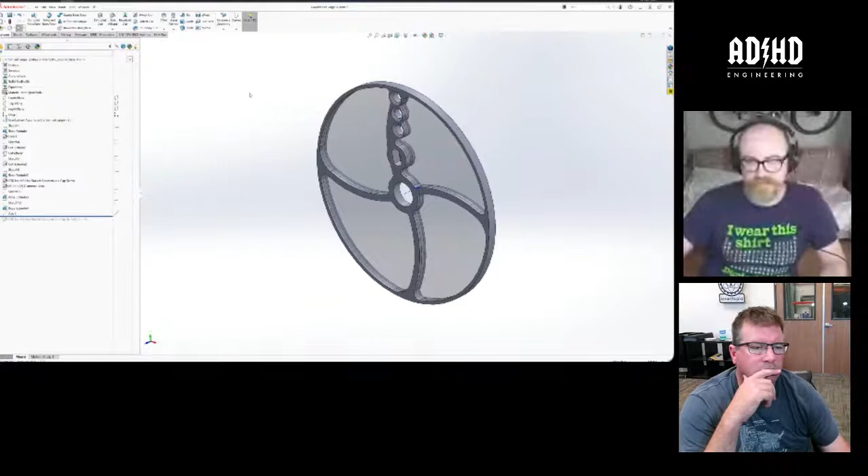And then you'll notice there's one last thing on the feature tree, and that is countersink. This particular feature I did not do in this part. I did this in the crank wheel assembly, and it populated back because it is a feature that is done in the assembly in order to put fasteners between components. So in this case, I'm going to X out of it. It's going to ask me if I want to update it. Sure, I didn't really change anything, but whatever. It asks me if I want to rebuild the assembly.

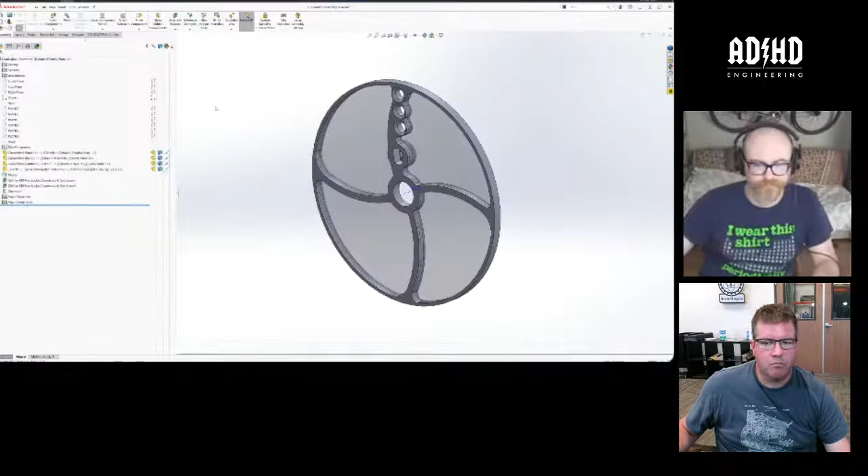To my assembly. Okay, and so that countersink is actually right here. I did it in the assembly, but it went up into the crank wheel, and so it's part of a feature under assembly features called hole series, and that allows you to do holes through multiple components at the assembly level. So then you can apply smart fasteners to it. You could do it during the hole, or you can do it after. In this case, I did it after.

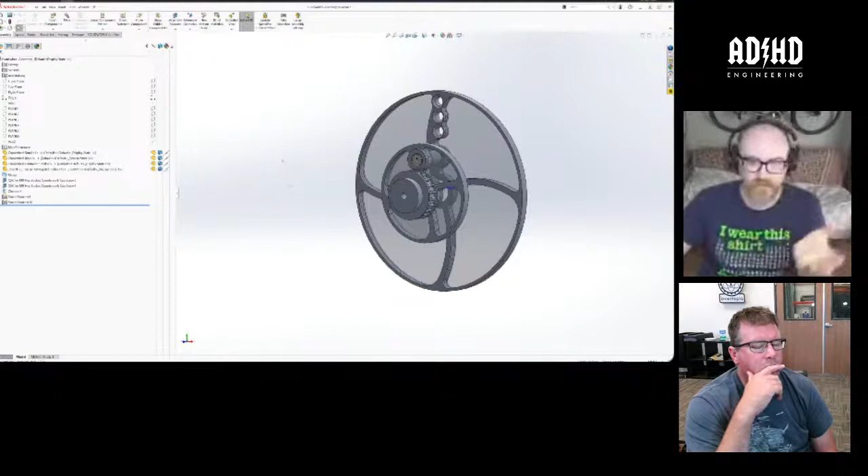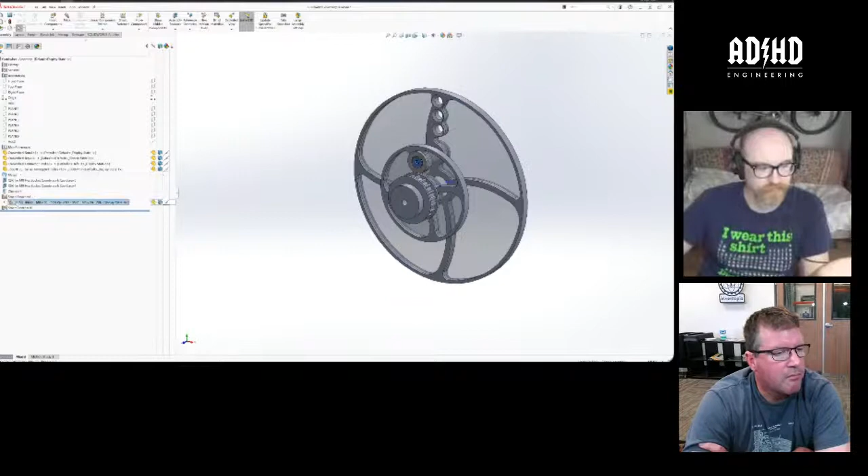Right. And it so makes sense. If you're bolting multiple things together in a subassembly, you don't have to go and edit both components. You just change the fastener. Yeah, that's really super interesting. I didn't know I could do that. Yeah. And so here's the smart fastener for that particular one, and I can actually go in and open the part if I wanted to. Generally, you don't want to. Say again? Can you zoom in on your model a little bit?